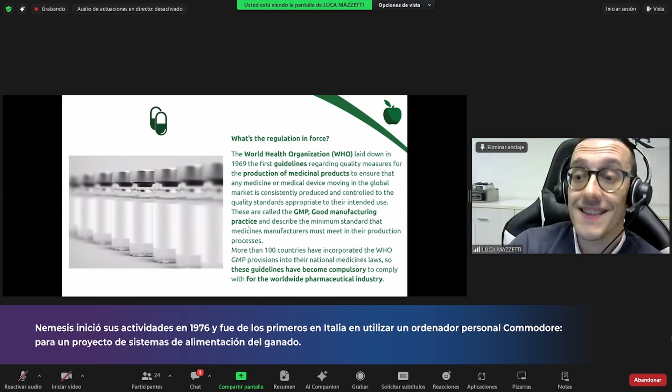Well, first of all, we need to do that because international regulation asks us to. The World Health Organization requires all pharmaceutical producers to keep a very precise and articulated series of procedures regarding the quality of their work and the quality of their manufacture. They are called Good Manufacturing Practice, or GMP, and they regulate basically how you have to work when you manufacture, produce and sell pharmaceutical products.

Together with the pharmaceutical product, obviously the regulation affects the entire production process of these products. So machinery used to produce these kinds of products is required to respect a very strict and important series of security processes. And here is where our equipment enters the game.

We can ensure the quality of the product by checking that the final packs are normally complete. More in depth, our quality inspection equipment can perform many different controls. The main one in particular is the control of the filling. So basically, if you have a jar that must contain 100 pills, the checkweigher, by weighing the final jar, will ensure that effectively you have 100 pills inside, not 99 or 101.

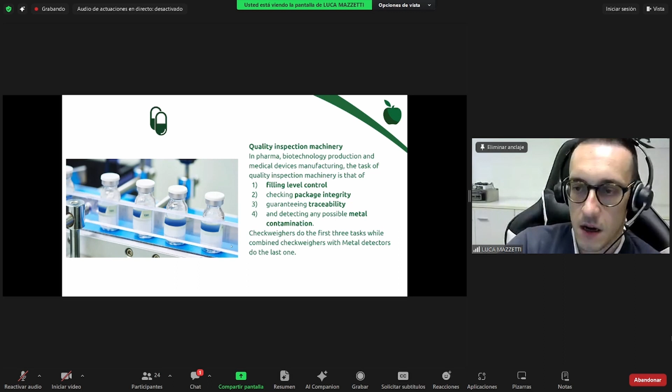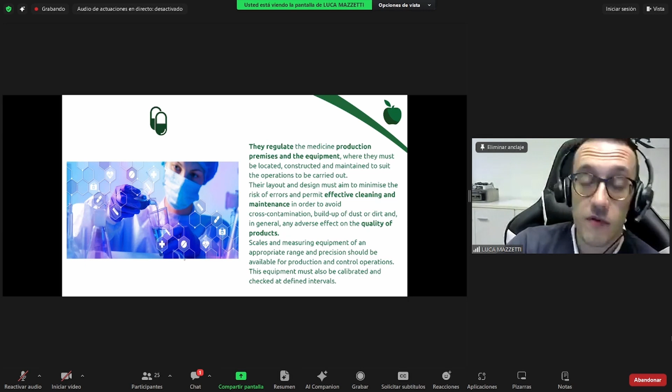Finally, as I was telling you before, we also integrate our solution with metal detectors, meaning we can also provide control of metal contamination - checking if products are contaminated with metal parts, and in that case, ensuring these contaminated items are not put on the market. All this discipline makes it very important to have checkweighers and metal detectors inside the production line, especially when you talk about pharmaceutical, because pharmaceuticals are obviously highly sensitive products for everyone.

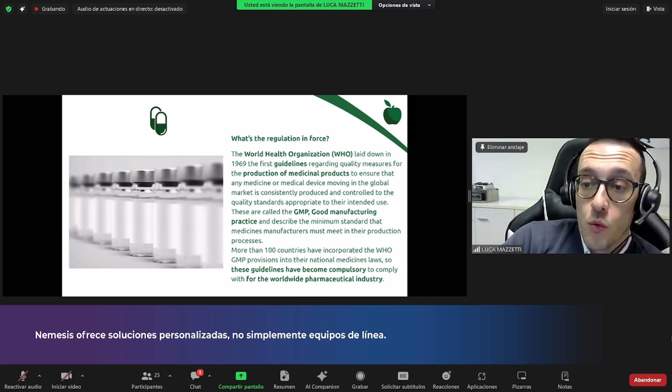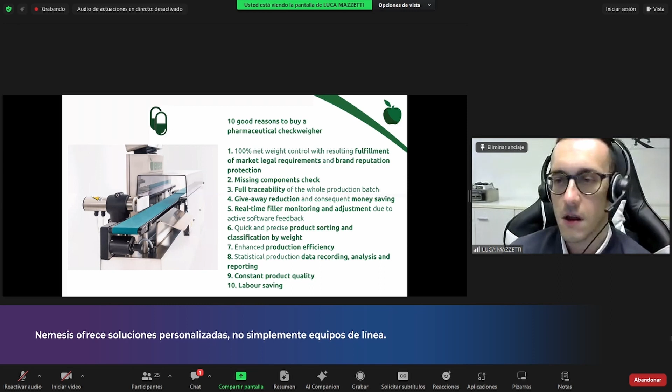What we now can discuss is basically how can we work with this machinery? Well, first of all, let's talk a little bit about why I should put a checkweigher in the line. We tried to resume all the reasons and all the advantages that a checkweigher can allow for your production in 10 points, okay?

First of all, as I was telling you, the fulfillment and the complete compliance of all the legal requirements that will protect your brand and will keep you secure against any kind of problem that should emerge after the sales of your product.

The check of the missing component gives you the certainty to control 100% of your production, ensuring that no missing items are included in any pack. Again, the full traceability of the product: this kind of machinery will record and keep stored all the history and information of the production batch, available for you on time to consult when required.

On the contrary, there is not only a matter of missing product, but there can also be a matter of excessive filling of the pack. If on one side we never want to miss product inside the pack, because this means the packaging is not compliant - we claim a given number of products are inside the pack, but then some are missing - on the other hand, we don't even want to give too much product.

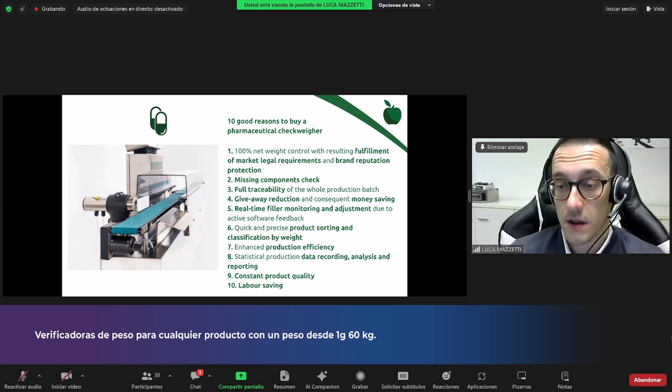I already told you about the data recording of the batch history, but at the same time, we developed a very complete range of software that can enhance the possibility of exporting the data and elaborating this statistical data and all the information of your production, in order to extract statistical reports that can be very useful for you to control your line and your production overall.

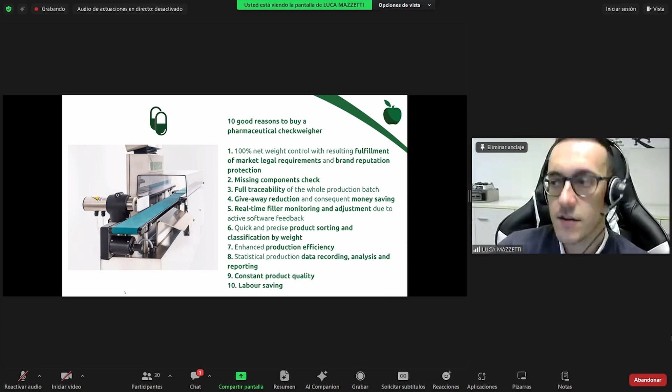Finally, last but not least, automating the control means you can save labor - an inferior number of operators required in the line to perform the control - and at the same time, avoid the risks generally related to human error, because you will control 100% of your production automatically. You won't even need sampling control, which is just to control 1 out of 10, 1 out of 50, 1 out of 100 products, meaning it's not a secure control. In this case, you will control 100% of your production.

We have a very complete range of solutions for checkweighers, meaning that we can generally work for applications between 1 gram and 60 kilograms. So we serve every industry with a very, very wide portfolio of solutions.

For the pharmaceutical industry, the range of machines we are focused on is called S-series, specifically developed for lightweight and fast applications. We always work with tailor-made solutions, and this is very important because we don't just have a catalog of fixed machinery. We develop every product as a custom unit, a tailor-made project studied for every single customer and application. This is one of the main strengths of Nemesis. We never just pick out your machine from a catalog, but we design your machine exactly to comply with your own needs.

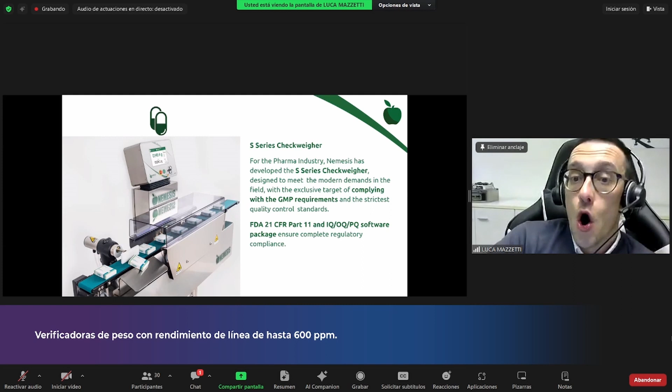All our machines, especially in this range, are also compliant with all the certifications this kind of machinery is subject to, both from the quality of weighing point of view, first of all the OIML R51 discipline, but also the FDA 21 CFR Part 11, as well as we can provide IQ, OQ, PQ software packages and documents.

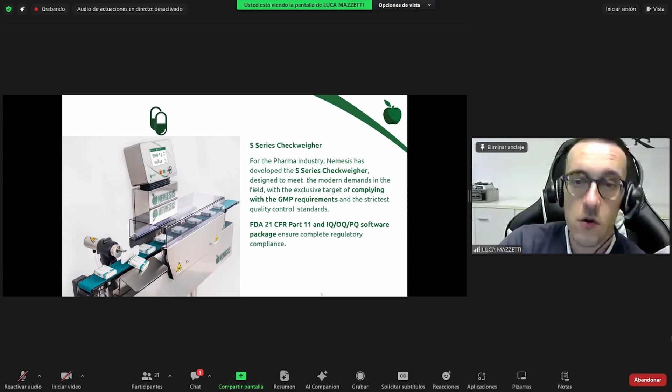Just to give you some ideas about the performance we can reach, the pharmaceutical range of our checkweighers can reach a resolution allowing visualization and processing of weight differences up to 0.01 grams, meaning very, very high accuracy, which generally combines with very high speed. Our pharmaceutical lines can be designed to reach production output up to 600 pieces per minute, meaning weight control of even 10 items per second, combined with a conveyor line speed of up to 120 meters per minute.

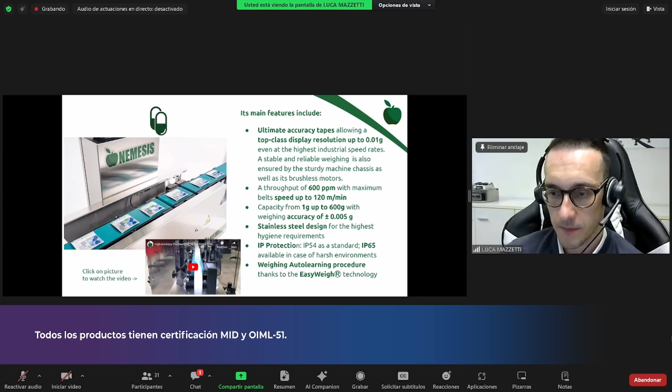Generally these lines are focused on lightweight applications, meaning that most of this equipment is designed to control products up to 600 grams, with a display resolution of 0.01 grams as I mentioned before, and even a weighing accuracy of 0.005 grams.

Everything is definitely GMP compliant, hygiene compliant, full stainless steel design and architecture. The IP protection ensures a very good possibility to wash and sanitize the machine up to even IP65. And all our range of solutions features our trademarked weighing technology called EasyWeigh.

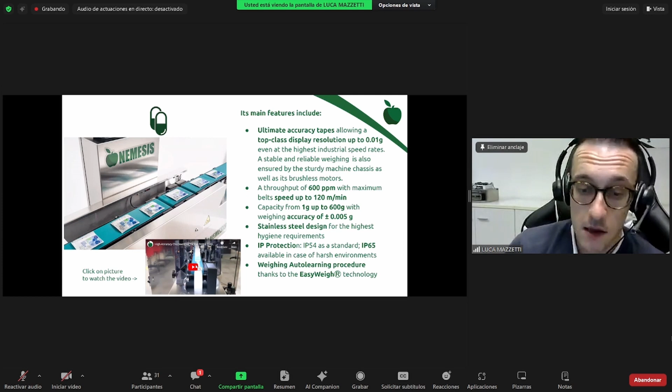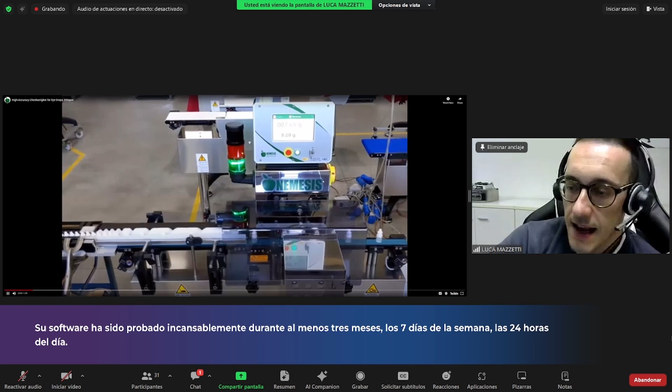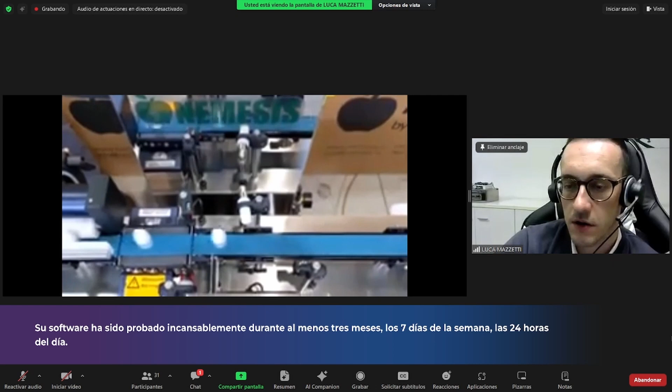Before talking more about EasyWeigh, I would like to show you a simple example of what a pharmaceutical line can be. In this case, we are looking at a line designed for very small eye wash jars. We are talking about very lightweight items that in this case were running at 200 pieces per minute.

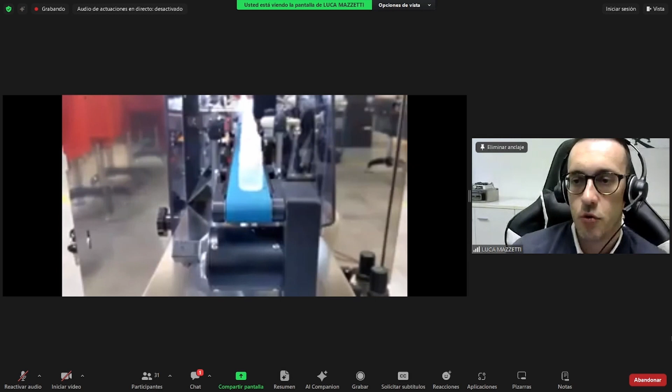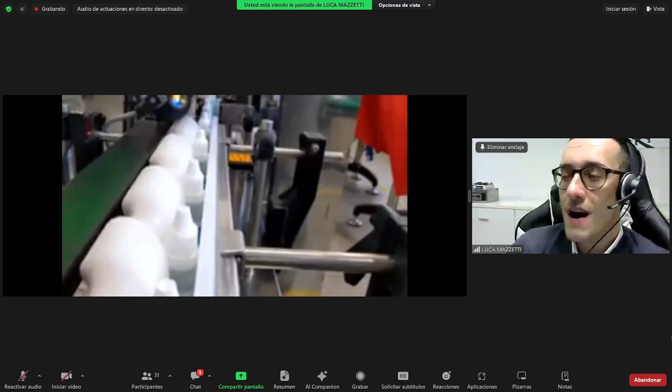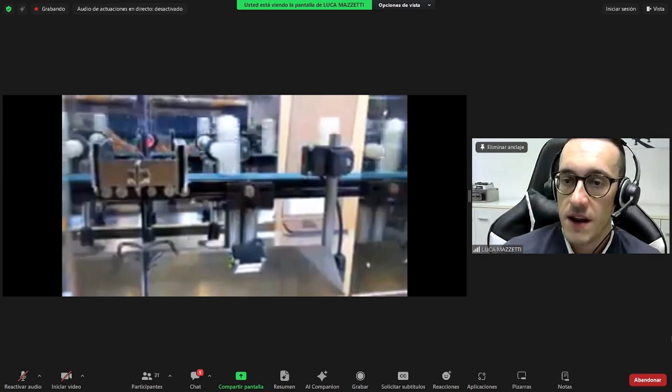A feeding screw, as you see in this moment, ensures proper spacing of the product, then they were controlled and all non-compliant items were discarded by an air blast ejector. Here, in the black row below, you can see how the machine determines the weight of the product up to 0.01 gram. No matter how difficult these products were to handle, being very small and unstable, we can build customized solutions like this one that are able to handle, move, and control these products.

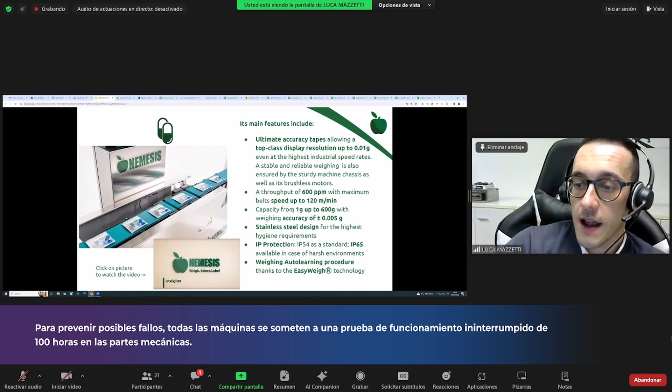Now, as I was telling you, the main feature of all our checkweigher range, and indeed the most identifying feature of Nemesis as a checkweigher manufacturer, is our weighing technology called EasyWeigh. EasyWeigh is our trademark algorithm for weight control in dynamic lines that brings you a very important ensemble of advantages.

First of all, this is very important in your daily use of the machine: all our checkweighers never require a learning procedure or calibration. This means that if you have a new product format, a new product for controlling, and you have to begin working with a new item you never controlled before, you will not have to go through any of those time-spending procedures like testing or calibrating the machine, or teaching the machine how this new product works.

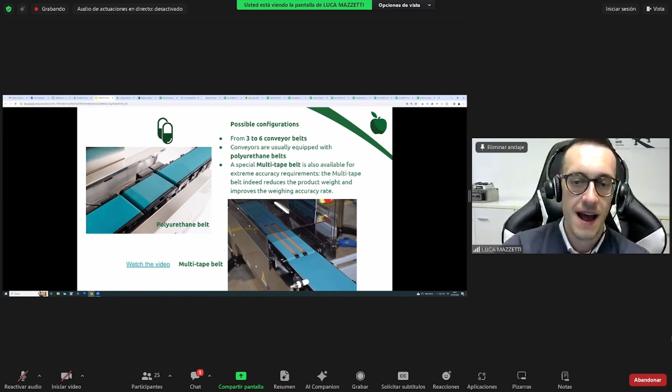We have a huge number of features that we can install on our machine: different numbers of belts, dimensions of the belts, type of belts. We can install devices of any kind.

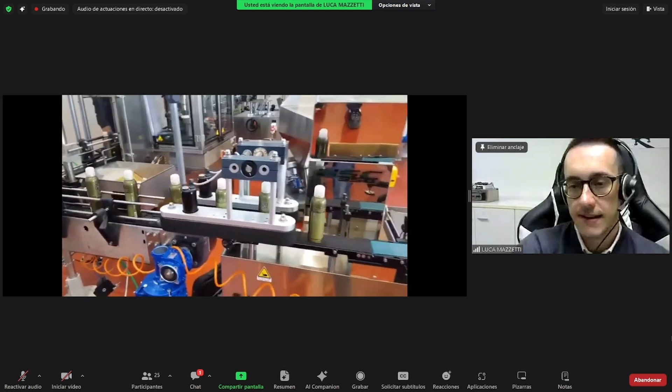For example, as we were seeing in the video before, for small products that come very close to each other, we can install feeding screws. Or, for bottle products or small-based and tall products, we can install sustain devices like this one, which is motorized support conveyors. This is a real line that is working on sprays.

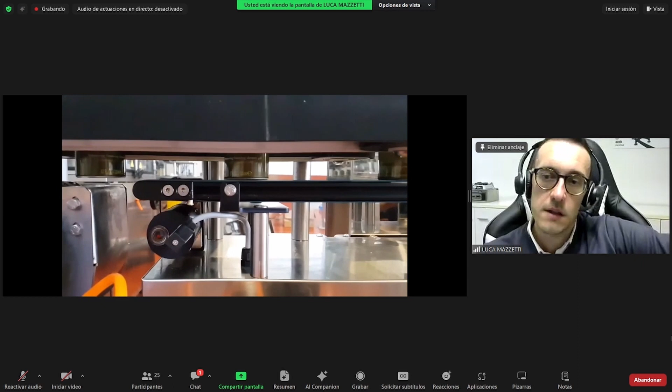For small-based products, you must be sure that they don't fall during the transfer to and from the machine. Normally lines have very big conveyors, so the product, especially when small-based, would risk falling during the movement. This is where we can install this kind of device to sustain the product.

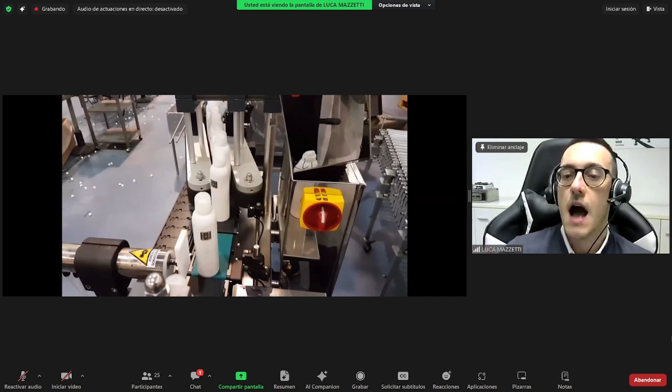Also, they allow something like this: to keep the machine not in the middle of the line, but installed side by side of the existing line. These kinds of belts will take the product out from the line, the machine will operate the control, and then the product will be moved back into the line. Therefore, you will not even have to cut your existing line, which means easiness of integration once more.

Again, we work with a lot of pharmaceutical products. We worked with pouch lines, blister lines, cardboard pack lines, and also small jar lines like this one.

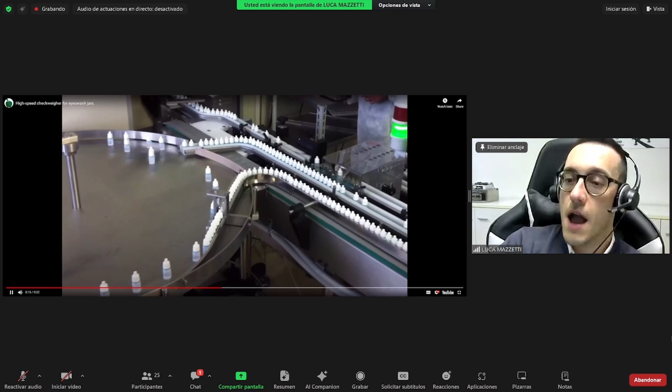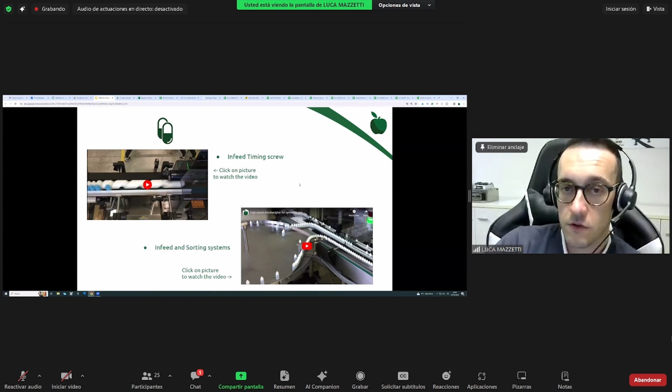They can even be complex lines, like in this case, with a lot of small items fed, all attached to each other. We need to handle the product and control it with very high weighing accuracy to ensure that it doesn't fall during the transfer and handling. We can do all of this thanks to our strong experience in this industry and a lot of devices that allow us to work in this kind of application.

When products are not compliant, they will be discarded from the line, meaning they will just be put out of the machine and will not move on in the production line. The ejectors, as well as all the other features of the machine, will be installed and chosen by Nemesis based on the product. Once we know the speed of the line, the shape of the product, and the weight of the product, we will find out what is the most effective and ideal tool for ejecting the product.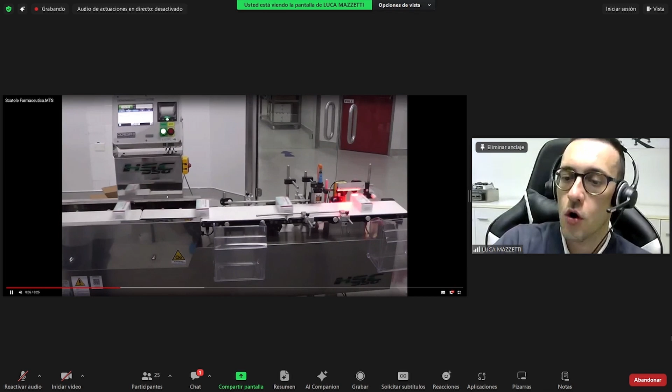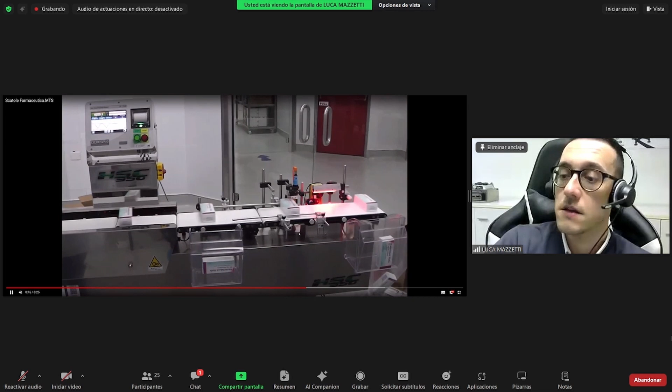Here you can see an example of a line that was working with an air blast ejector, so the products are blown off thanks to a blast of compressed air. In this case, the machine was also integrated with a second control, which was marking of the boxes, then a visual control that the marking was done correctly, and a second ejector discarding the product that was not marked correctly.

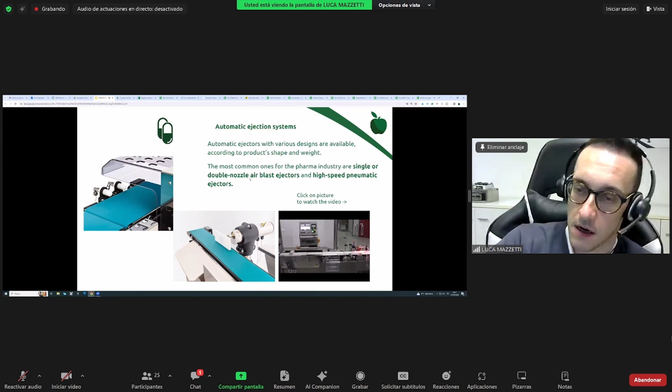Even more, especially in pharmaceutical lines, we need safety devices. We need to be 100% sure that no problems and no defects can occur in the production line. This is why we offer a huge number of security tools, such as an air pressure switch to always keep the air pressure controlled, in order to avoid, for example, that there is not enough pressure for the ejector to work properly.

This is generally combined with a security photocell for confirmation of the reject, so the photocell controls that if a product was intended to be discarded, it is actually discarded. There's also a rejection bin to collect the discarded items, and rejection bins must, in many cases, even be lockable. They can feature key locks or electrical locks based on your requirements. The security photocell, once again, will alert once the rejection bin is full, to let the operator know that they have to empty the box.

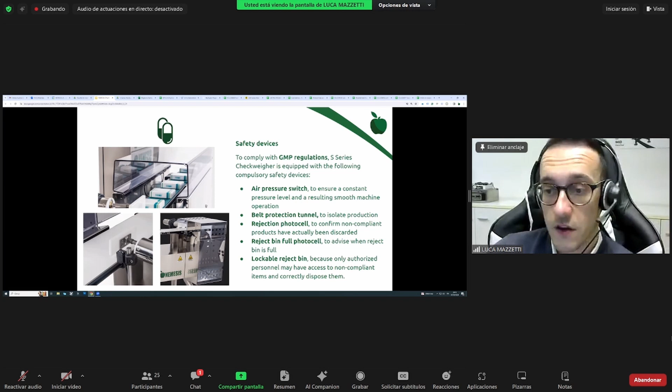Metal detectors operate as an additional and complementary control to the checkweigher. The checkweigher automatically controls the weight of the product, while the metal detector controls if the product is not contaminated with metallic particles.

In particular, the metal contamination that the metal detector can detect belongs to the families of ferrous materials, non-ferrous materials like aluminum, for example, and stainless steel.

Nemesis, as a manufacturer, does not build metal detectors. We are manufacturers of checkweighers, not of metal detectors. We integrate CEIA metal detectors. CEIA is an Italian company, one of the world leader companies in this sector, and we have worked with them for over 20 years. We developed a complete degree of integration between our checkweigher and CEIA metal detector.

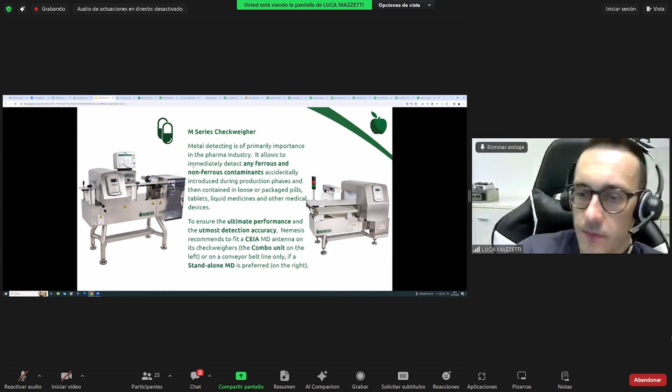Generally, the metal detector is installed together with the checkweigher in a combined unit like this one, which is composed of a metal detector conveyor with the metal detector antenna installed and an ejector dedicated to the contaminated items. Why? Because the security laws make it mandatory to keep the discarded products separated.

By one side, the contaminated items, by the other side, the non-compliant weight items, so the overfilled and underfilled, because the reason why you discard these items is completely different. Therefore, the security regulation makes it mandatory for you to keep these kinds of products separated.

And even more, for all the contaminated items especially, it's mandatory for you to keep collection bins featuring key-lockable doors, because the operator never has the possibility to take back the product and put it back into the line.

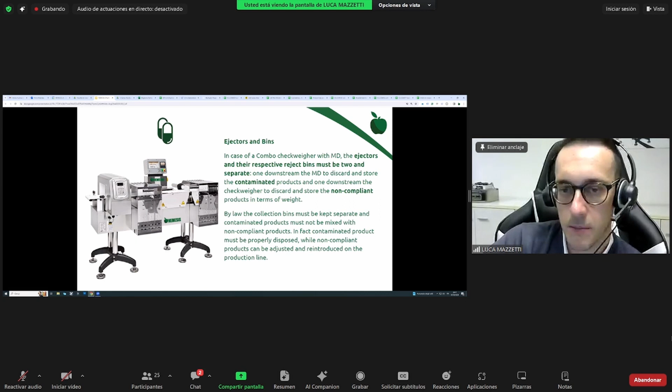Once again, even in this case, all the machines will be designed based on the requirement of the line concerning the dimension of the conveyor, the number of conveyors, the type of ejector installed, as well as the kind of collection tools for the product, as well as the security devices installed, the metrological performances.

So it will always be a tailor-made choice concerning the maximum scale capacity, the scale interval, which means the weighing accuracy of the machine, and the speed that the machine can reach, both in terms of linear speed, meters per minute, and in terms of number of pieces per minute.

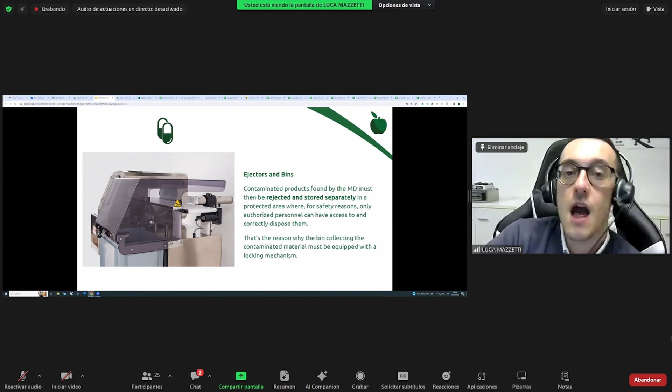Just so you know, metal detectors are normally determined, once again, as a tailor-made choice, because we will choose between different types of technologies in the CEIA metal detector range, starting from multi-frequency metal detectors, coming up to multi-spectrum metal detectors that are able to work with more frequencies, with an entire range of frequencies, all at the same time. So a multi-frequency metal detector is generally able to work with 3, 5, 10 frequencies, but only one at a time, so you have to choose which one to use in any given moment.

The multi-spectrum metal detector gives you the possibility to examine based on an entire range, an entire portfolio of frequencies all together.

At the same time, the metal detector antenna will be dimensioned based on the product to be controlled, because the electromagnetic field that makes a metal detector work effectively requires it to be, for example, as close as possible to the product to be controlled.